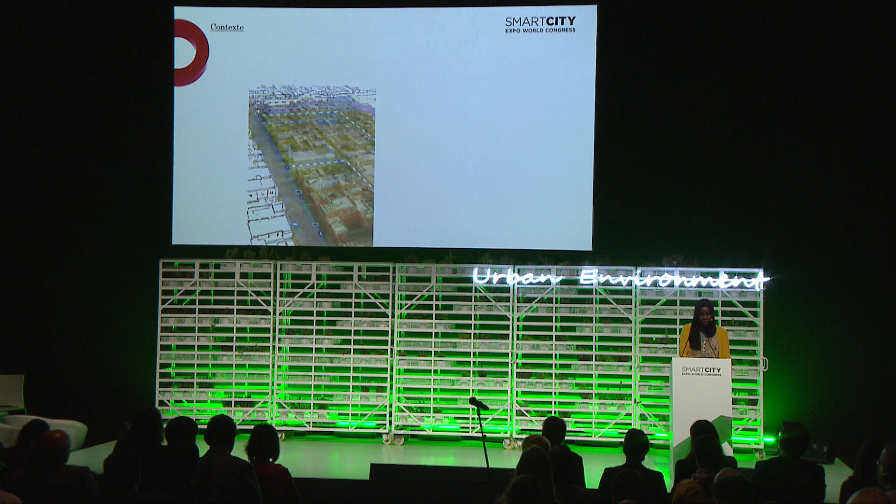Ce qui a amené automatiquement l'État à réfléchir à comment résoudre cette problématique, le ministère de l'Environnement, plus la région qui était anciennement une intercommunalité, c'est-à-dire le regroupement de plusieurs communes, plus en collaboration aussi avec la GIZ, la coopération allemande. Ils ont pensé à un projet qui s'appelle adaptation au changement climatique des villes côtières.

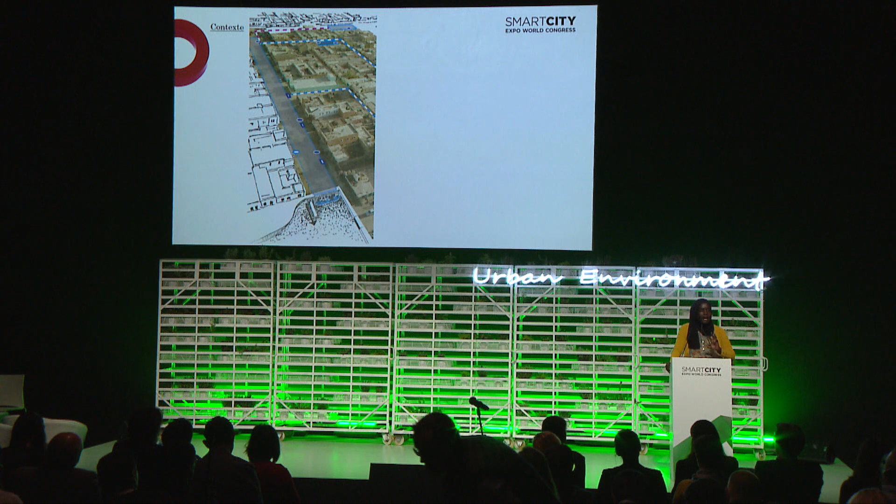Qu'est-ce que ce projet consistait à faire? Un diagnostic participatif, c'est-à-dire que la solution va venir de la population, parce que c'est pour eux qu'on cherche une solution. Eux, ils sont capables de nous dire de quoi ils ont besoin. Et en fonction de ça, on va établir une solution adaptée à la situation de la ville, localement.

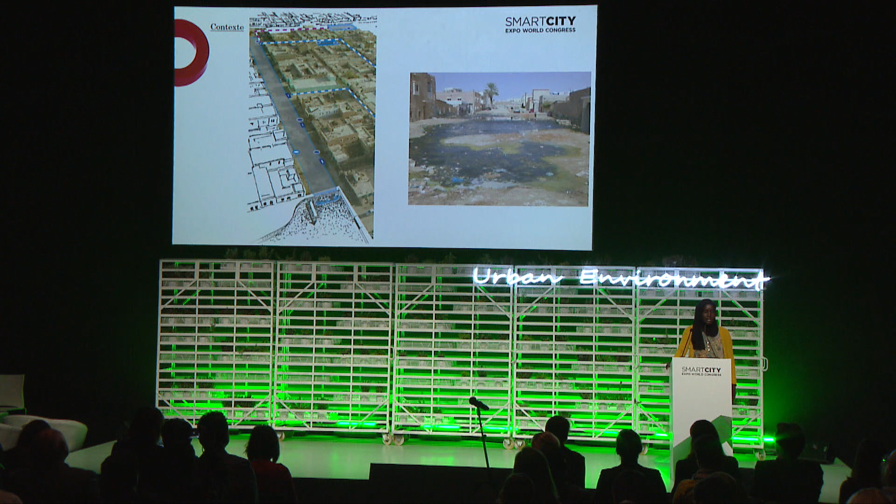L'idée première était qu'on ne voulait plus d'eau stagnante. Il fallait carrément enlever cette situation de l'eau qui stagnait pour que la ville ne soit plus paralysée en période de crise.

La démarche, qu'est-ce qu'elle proposait? Elle proposait une stratégie de proximité, s'adapter de manière très efficace au changement climatique. Nouakchott est l'une des villes les plus vulnérables d'Afrique. C'est une réalité, le changement climatique. Si on a vécu 10, 20 ans à Nouakchott, on sent réellement que le changement climatique existe. Et les effets sont ressentis au niveau local. Donc il faudrait trouver une solution rapide pour que cette ville soit plus résiliente. Cela passe par des infrastructures plus adaptées.

Le projet adaptation au changement climatique des villes côtières. La première chose, il fallait éviter que la ville soit paralysée quand il pleut. Ça, c'est la première chose. La ville ne possède pas de système d'évacuation des eaux de pluie, ni des eaux usées.

Nous avons un système d'assainissement ou de collecte des eaux usées personnalisé, par personne, par domicile. Donc la solution qu'on préconise, c'est de faire un drainage des eaux. La première chose qu'il faut faire, c'est de niveler tout le site pour que l'eau puisse être évacuée d'une manière uniforme. Et vu qu'on n'a pas un système qui regroupe tout le quartier, on a procédé par bloc d'habitation.

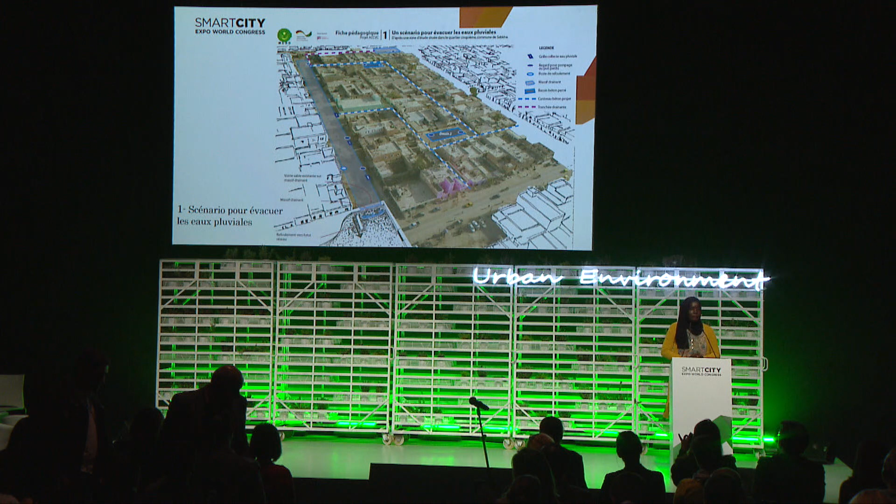Là où la circulation est moindre, nous avons utilisé des moyens beaucoup plus par des caniveaux. Et là où il y a vraiment la circulation, nous avons placé des tranchées drainantes. Et là où la circulation doit se passer, on est passé sur du massif absorbant et sur lequel on a placé des couches de sable compactées pour que l'eau puisse couler et que les voitures puissent circuler. Et on a proposé aussi des réserves ou des bassins où l'eau va être stockée en attendant d'être pompée ou d'être reliée au futur réseau d'assainissement.

Schématiquement, ça donnait ça. Et sur les espaces ou les bassins où on mettait le stockage, au-dessus, on a voulu valoriser un peu cet espace-là, qu'il ne soit pas juste un espace pour stocker de l'eau. Au-dessus, on a essayé de mettre des espaces peut-être de jeu, des aires de détente ou des espaces publics, des bancs, pour que les gens puissent s'y installer et que cet espace soit un peu valorisé. Et là, sur l'image, vous avez vu comment l'eau est drainée et que ça passe par les caniveaux pour être stockée ou évacuée vers le futur réseau.

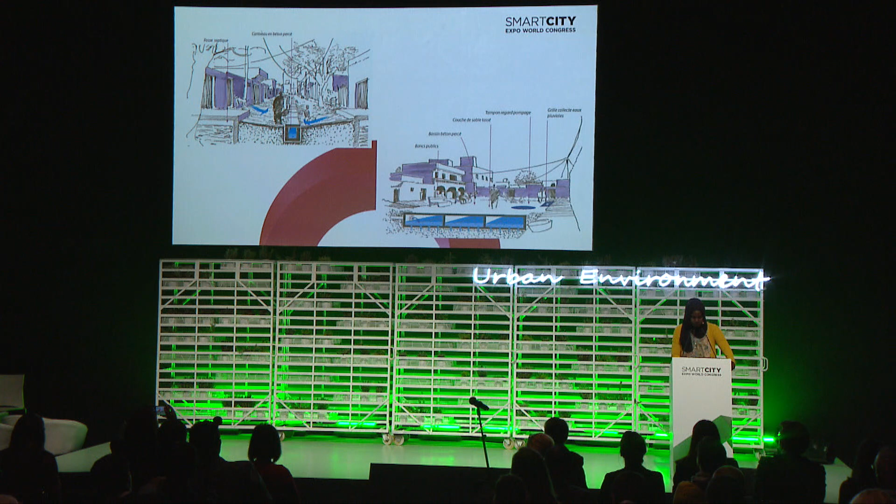Le deuxième scénario, c'était par rapport au centre de santé. Les trois problématiques ou les trois zones les plus touchées, c'était la circulation à l'intérieur de la ville, les centres de santé et les écoles. Les centres de santé, qu'est-ce qu'ils avaient comme problème? Il fallait qu'ils soient accessibles à tout temps. Durant les pluies, la plupart d'entre eux n'étaient pas accessibles. Donc il fallait trouver non seulement une solution pour l'évacuation des eaux usées, mais aussi les eaux de pluie.

Nous avons pensé à peu près à la même solution pour le problème des quartiers. Mais là, la plus-value est que cette eau usée va être recyclée. Recyclée comment? Elle va être retraitée et on ne va pas la verser dans la rue, mais on va l'utiliser pour arroser les plantes qui sont à côté. Donc on ne pouvait pas mettre un bassin à l'air libre à cause des problèmes sanitaires. Et on ne pouvait pas non plus laisser ces bassins-là vides. Donc il fallait aménager des espaces pour que cette eau puisse être utilisée pour planter des arbres, par exemple.

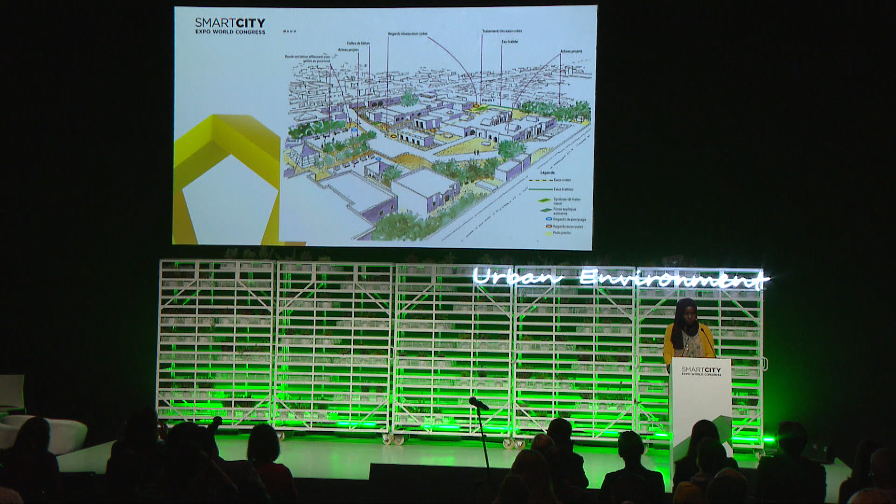En gros, ça donne ça. Le bassin est enterré. L'eau, avec le béton poreux, nous avons une infiltration de l'eau. Et au-dessus, les espaces de jeu, ou bien les aires de jeu ou de détente autour des centres de santé. Et comme ça, il continue à être fonctionnel, et en même temps cet espace-là peut servir de stockage pour les eaux de pluie.

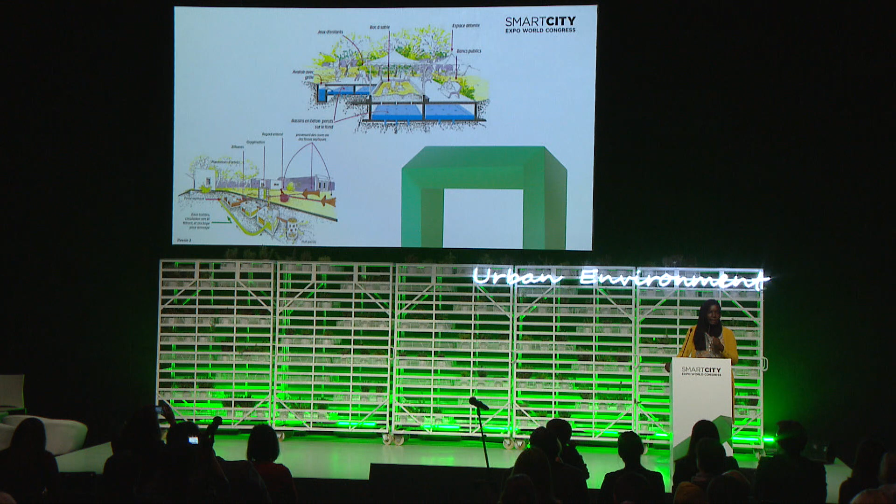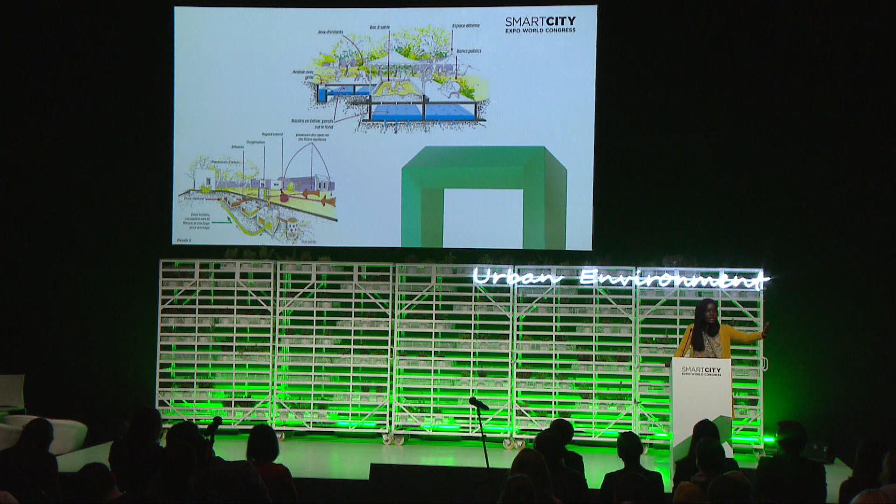Pour le traitement des eaux usées, c'est la même chose. Le centre avait déjà un système de traitement, mais la moitié n'était pas fonctionnelle, ou bien la capacité n'était pas adaptée. Donc il fallait étendre le réseau pour qu'on puisse récupérer les eaux usées des autres bâtiments et les traiter, pour qu'on puisse ensuite les redistribuer dans le centre en arrosant les plantes ou bien les jardins maraîchers qui étaient à côté. Il fallait les arroser avec.

Le troisième, c'est dans les écoles. Les écoles, quand l'ouverture est en général en octobre, on ne reprend qu'à mi-décembre. Il fallait attendre que l'eau sèche dans les écoles pour que les cours puissent commencer, parce que l'école n'était pas accessible. Donc il fallait trouver une solution pour évacuer les eaux, pour résoudre ce problème de paralysie de l'enseignement.

Les toilettes, dans les écoles en général, ne sont pas du tout accessibles ou en bon état, donc il fallait les réhabiliter. Utilisation des fosses septiques pour le traitement des eaux, et en même temps faire de cet espace-là un espace récréatif qui soit attractif : quand je sors de la classe, l'espace où on stocke l'eau sert aussi de cour de récréation où les enfants peuvent jouer et tout.

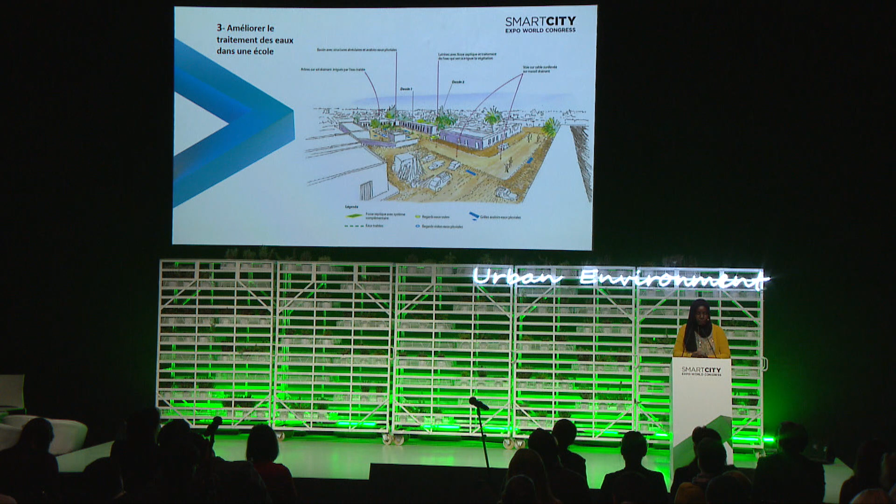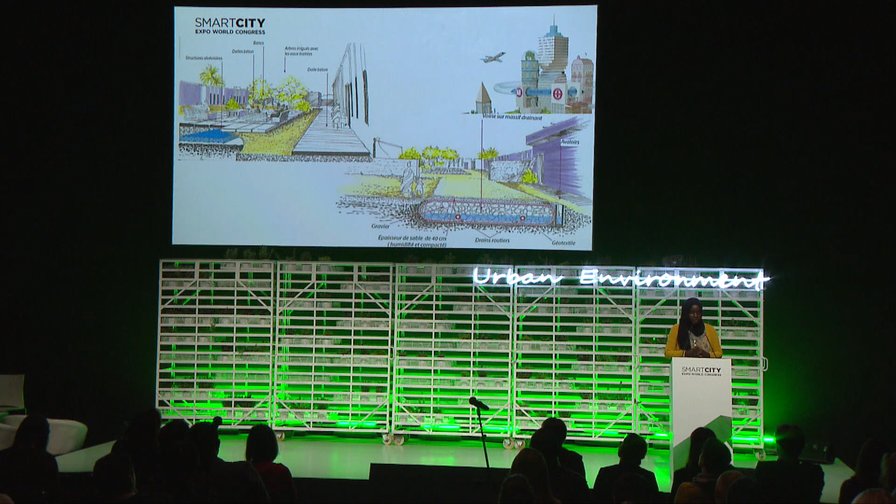Autour des salles de classe, on avait une dalle en béton surélevée qui parcourait toutes les classes. Donc même quand il pleut en saison de pluie, l'école était carrément fonctionnelle. Et aussi, nous avons pensé à un système qu'on appelle un système alvéolé, où on stocke l'eau et qu'après elle puisse être utilisée et redistribuée partout à l'école.

Partant de cela, à la région nous avons compris, ou bien nous étions conscients, que la résilience peut aussi passer par le digital. À Nouakchott, ce qu'on appelle le système d'adressage n'existe pas. Personnellement, je n'ai pas d'adresse fixe à Nouakchott. Donc c'est une problématique à laquelle il fallait aussi trouver une solution.

Cette solution, c'était quoi? Intégrer ce qu'on appelle ASToN, un réseau de 12 villes d'Afrique. Au niveau de ces villes-là, chaque ville devait choisir une problématique propre, que ce soit l'e-gouvernance, le traitement des déchets, la fiscalité, pour y répondre de manière locale et surtout très détaillée.

Là, c'est le réseau des 12 villes. Nouakchott, nous avons décidé de travailler sur l'adressage. Parce que l'adressage, ce n'est pas seulement, comme j'ai dit, une question d'utilité civile. C'est aussi un levier qui peut servir à développer d'autres secteurs, que ce soit le secteur des banques, le secteur du transport, le secteur même de la sécurité, et tout dépend de ça.

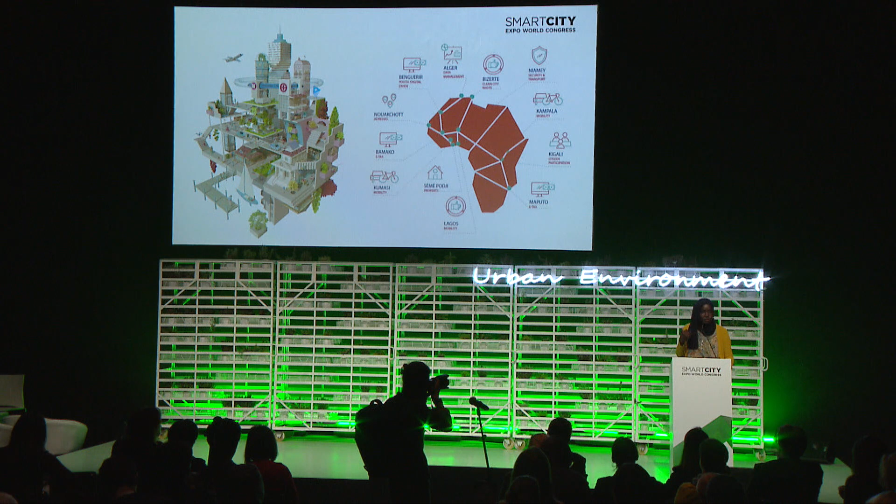Si moi je n'ai pas d'adresse fixe, si jamais il y a le feu chez moi, je ne sais pas comment les secours peuvent arriver jusqu'à domicile. Donc c'était vraiment devenu une nécessité par rapport à ce projet-là, et nous avions vraiment décidé de travailler sur ce projet dans le réseau. Le réseau, on partage des expériences, et ça permet aussi de profiter de l'expérience des autres. Parfois, d'autres ont fait des choses qui ont marché, que nous on pourrait utiliser pour avancer plus vite.

La première chose qu'il faut faire, c'est ce qu'on appelle un état des lieux du numérique : où est-ce qu'on en est réellement? C'est la baseline study, on fait une étude de l'état du numérique dans la ville. La deuxième phase, on élabore un plan d'action qui va nous servir à travailler : quelles sont les solutions qu'on va apporter face à cette problématique-là? Et la troisième chose, on élabore un prototype.

Le prototype, c'est quoi? Par exemple, nous qui travaillons sur l'adressage, nous allons choisir une zone et faire l'adressage de cette zone-là correctement, avec une application qui puisse servir à tout le monde, et que tout le monde peut utiliser.

La problématique aussi qu'on a rencontrée, ou bien qu'on pourrait améliorer, ce sont les services urbains. Parce qu'on se dit, le numérique, à la fin, c'est quoi? C'est juste pour faciliter, rendre meilleure ou accessible la ville. Donc les citoyens ont besoin que les services soient accessibles, que ce soit le transport, le développement des activités économiques, tout ça doit être accessible. Et on a pensé que cela peut passer par le numérique.

Une ville aussi grande, qui se développe de jour en jour, a forcément besoin d'un système de repérage. Sans ça, on se perd facilement dans cette ville. Les quartiers périphériques, il faudrait aussi trouver une solution, que ce soit par les infrastructures résilientes ou par le système de digitalisation des données, qui pourront servir aussi à améliorer l'accessibilité à cette ville et sa résilience.

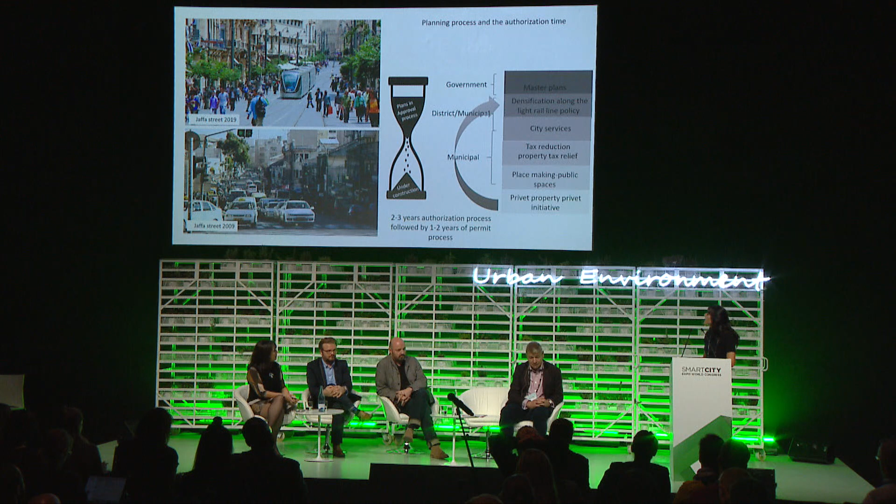But the thing is, I don't want to tell you the whole process because it's long and boring, but it takes so many years to approve a plan. And that's not even including the permit process. So as I told you before, we don't have this luxury of time.

And we were thinking, how can it be reinforced? In the deal we are offering, we did a master plan - a deal between the developer, the tenant living in the existing building, and the city. In this deal, the tenant gives the roof rights to the developer. The developer builds new units on top of it. In return, the tenant gets reinforcement of their own house, and they get a 25 square meter addition to their house, which - I don't know if you've ever been to Jerusalem, we have a very high birth rate - so 25 meters is a blessing for most people. The people living there usually cannot afford their reinforcement themselves.

So in this process, they are getting this reinforcement without taking $1 out of their pocket, and the city is growing inside, getting more strong. It's a sustainable building because it's not expanding outside. We are not developing outside of the city line to suburb. So everybody wins in this process, and it's a short process. It doesn't take years. I wanted to show you why this deal is especially great in Jerusalem.

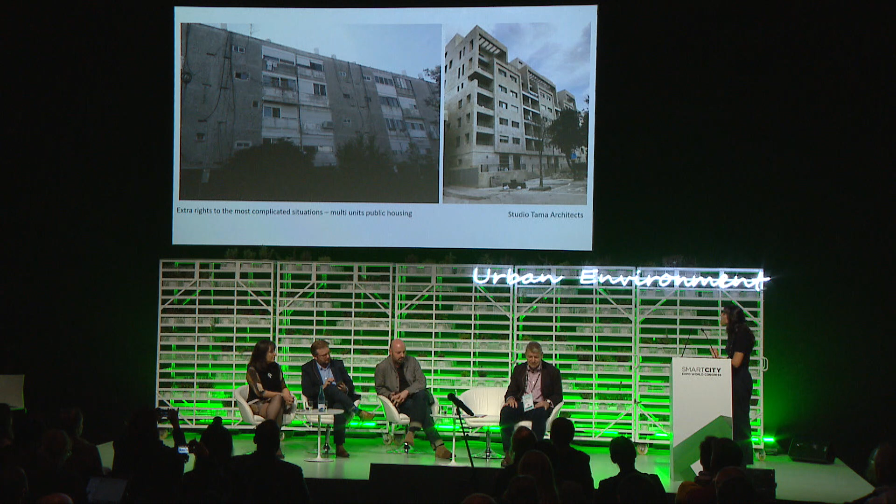It's very bad shape. You can see the wire is exposed, the infrastructure is exposed. Actually, you don't have to wait for an earthquake for it to fall. I think just a good kick will be enough. But on the right hand, this is not rebuilt, this is reinforced. I took this photo myself, and I still can't believe it. This is the same building, because it's such an extreme makeover that it's unbelievable.

And it's brought a big, big change to the whole area, because when people that live there see this change and how beautiful it is, everybody wants to renew now. By the way, the people that live there, they didn't afford even $1, but the property value now is $250,000 more. Their own units are worth now, without doing anything, they got this present just out of this deal that it cost nothing to the municipal, to the government, and to the tenant.

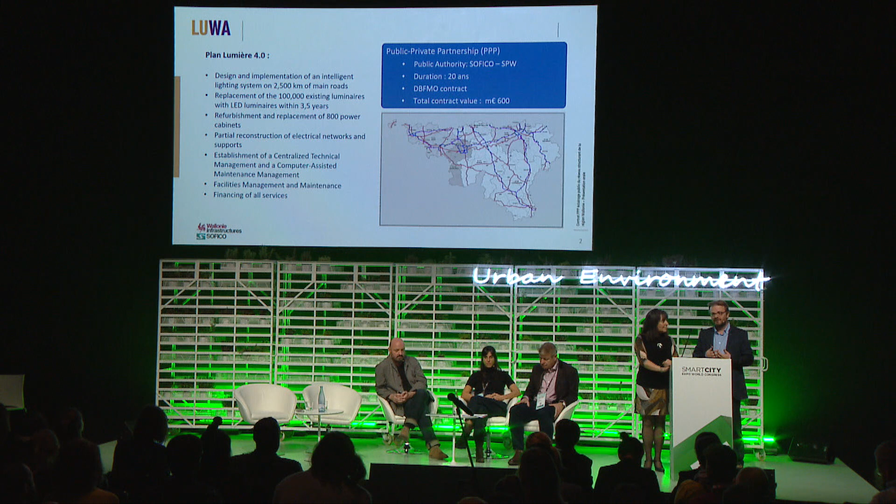This is also a partnership, so the private side took on more of the basics. They put in the added value, which I would say is the main value. And for the main value, I will give the floor to Carmen.

Okay, I wouldn't say that this is the main value, because something that is key is that to have a smart infrastructure, you need smart clients. The first question is to have clear needs explained. For the Walloon government, Sofico, and SPW, it was very clear that the infrastructure need was something key to solve different problems.

One of them was the economic problem. Before the works, the lighting of the Walloon highways was very expensive. It uses lots of energy, so reducing the cost of that is key. You also have environmental issues, because on one side you are putting a lot of carbon in the atmosphere by wasting energy, and on the other side, today you can see Walloon highways from the moon because the light is going upstairs. That's not good for nature either, so finding a solution for that is key.

Another key point was about the users of the highways in two ways. One was having well-maintained infrastructure and knowing when to mend lights that are not working, as Denis said, but also about improving the safety of the highways, because today you have many accidents. The Walloon highways are not exactly highways, it's almost like city roads, because you have lots of dwellings around. It's a very dense network, so how do you improve the safety of that?